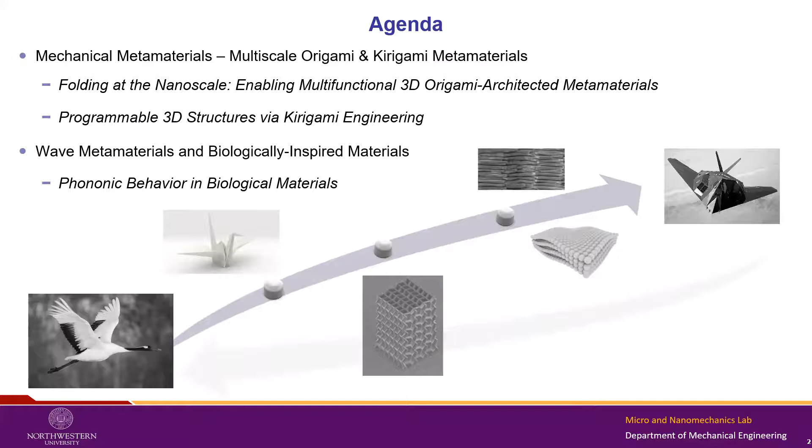In mechanical metamaterials, you usually have meta atoms, which are units that repeat and can deform, fold, rotate, or snap. This has given birth to a wide array of metamaterials, including cellular and extremal metamaterials, mechanism-based metamaterials, and instability-based metamaterials, which have brought this interesting concept of buckliphilia versus buckliphobia. If you have the same background as me, we were usually taught that buckling is a phenomenon to be avoided, but there has been a lot of research into actual functionalities of buckling, like how can we exploit buckling for good purposes. And then we also have topological metamaterials.

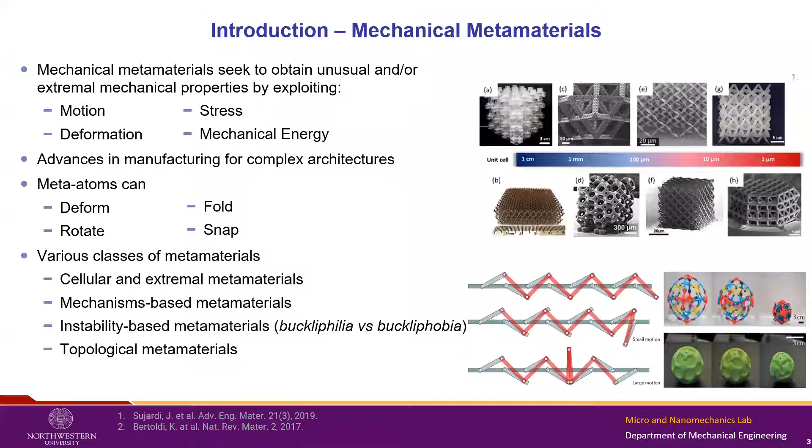So within the first subset of metamaterials that we have studied, we have the field of origami engineering. The most salient property of origami designs is the property of folding. Origami comes from the Japanese art of paper folding, so that's basically what we try to recover when we do origami engineering.

This property of folding, this foldability, enables shape morphing. We can obtain very complex patterns just by exploiting this foldability. There are actually some universality theorems that basically say you can fold pretty much anything, and that's what I'm showing there with the origami bunny, which I don't know how many hours that took, but must have taken lots of hours.

Another interesting aspect of this foldability is the property of deployability, which enables going from 2D structures to 3D structures. This is important for space optimization.

These origami metamaterials have been discovered to have some very interesting mechanical properties just from the geometrical aspects of their folding. So we have auxeticity, stability, directionality or anisotropy, and tunability. We can change these properties with compression or with deformation. And we also have the issue of scalability.

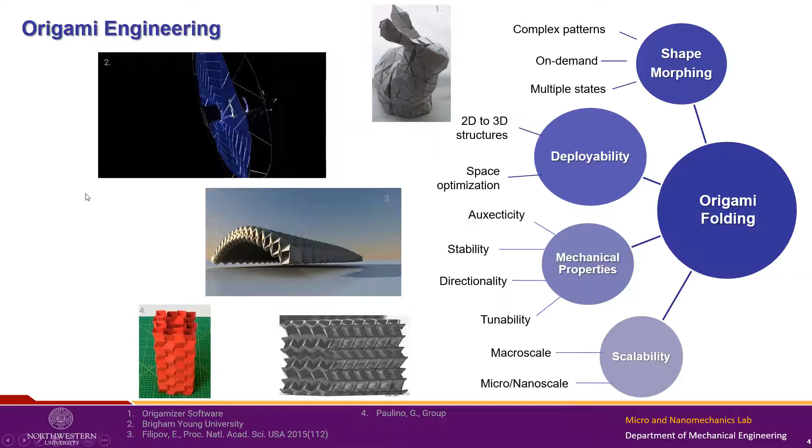So we can take origami concepts from the macroscale to the micro and nanoscale. So it's all very nice. But it's easier said than done, because the translation of these paper origami concepts into actual origami metamaterials is not very straightforward.

The folding displayed in paper is very different from the folding with actual or conventional engineering materials. When we do origami with paper, what you basically do is locally damage a crease where you actually do the fold, and this brings down the stiffness in the fold. But can we really do that with actual engineering materials that are going to be subject to more stringent environmental windows? So when we try to recreate that, it creates a problem.

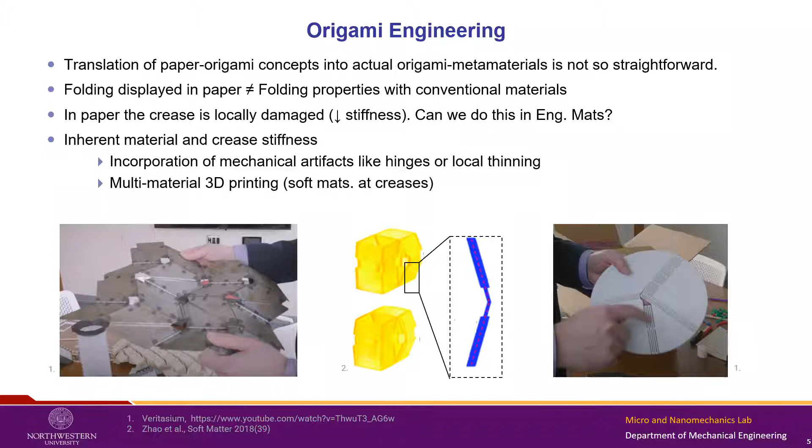People have tried to circumvent that problem or solve it by incorporating mechanical artifacts like hinges or local thinning, or using soft materials at the folds to allow this foldability. So that is one of the issues.

The other issue that kind of prevents the use of origami metamaterials is that it's nice, you can do a crane, you can do a bunny, but that's not an engineering material. So how can we use these origami concepts to create something that's actually usable, that can take load, or that can perform under different stresses or engineering requirements?

So what we did is based on a work by one of Paulino's students. We used the concept of a Miura-Ori tube, where the most famous pattern in origami is called a Miura-Ori strip. If you cut those and assemble them in some way, you can obtain a Miura-Ori tube. Then, by ingeniously assembling them, you can obtain aligned or zipper couplings of these tubes, creating a 3D origami metamaterial that has interesting properties.

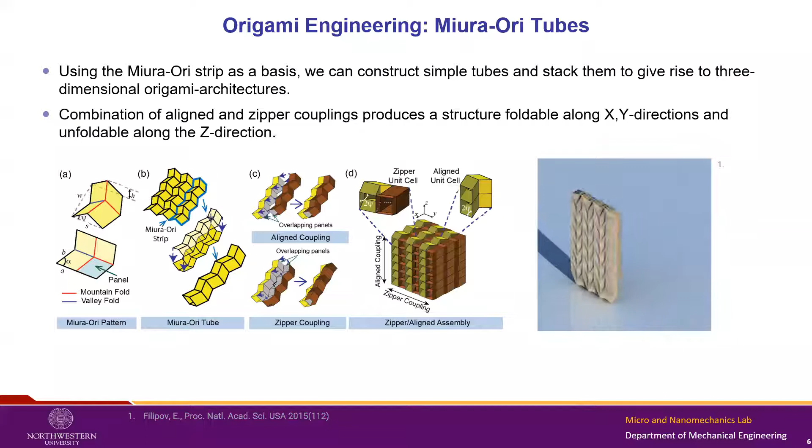So having said that, what we had, I frame it as two challenges.

We have the first challenge, which is can we recreate these folding mechanics, which are very different from paper? And the other challenge is how do we create origamis, 3D origamis that have an actual functionality? So those are the challenges, and the solution is, for the first issue, the folding mechanics, we decided to go micro and nanoscale origamis.

And for the second challenge, we used the concept of these Miura-Ori tubes to create these 3D origamis. In the middle, we have multifunctionality, all these properties that we were able to recover that were predicted from basic geometric analysis of these Miura-Ori tube assemblies. We were able to recover most of these properties. This work was published last year in Small, and it got some interesting news coverage.

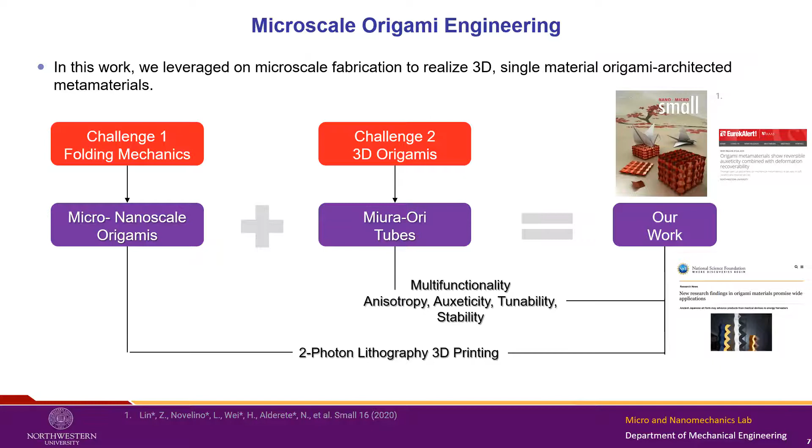So how did we do this? As I said, the first challenge was the challenge of folding, so to do that we went to the micro and nanoscale. We fabricated via two-photon polymerization, two-photon lithography, which was done by Sridhar Krishnaswamy's group here at Northwestern. They have a lot of experience printing these kinds of structures, which are quite complex actually, because you have angles and panels, and a lot of difference between the thickness of the panels and the actual length of the unit cells.

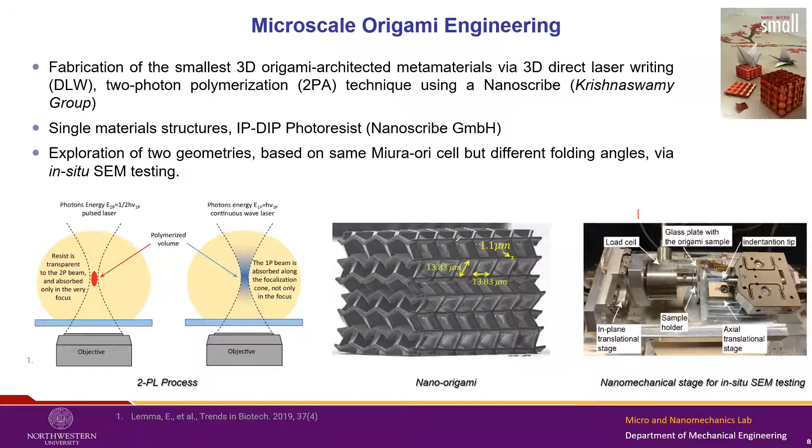As I said, we were able to recover most of the properties that come from this foldability. The first interesting properties that we were able to see were the stiffness anisotropy. Basically, once you have this 3D Miura-Ori tube assembly, you have two directions that are foldable, and then you have one direction which is stiffer, which is the one where you have the zipper coupling that I mentioned before.

And so we were able to observe, by doing stepped compression and recovery phases instead of a simple cycle of compression and unloading, as you see here - we compress, and then we cycle back and forth, and that allows us to study the stiffness tunability of these metamaterials as the overall compression of the structure progresses.

So we were able to see that the stiffness does change with compression depending on the orientation, and as you can see here in the pictures, we were able to retrieve that foldability, which was one of the main challenges we had, and what distinguishes origami designs from other kinds of metamaterials. They also have some very interesting properties - you can compress these structures to like 30%, and then recover up to like 96%. So that was pretty encouraging as well.

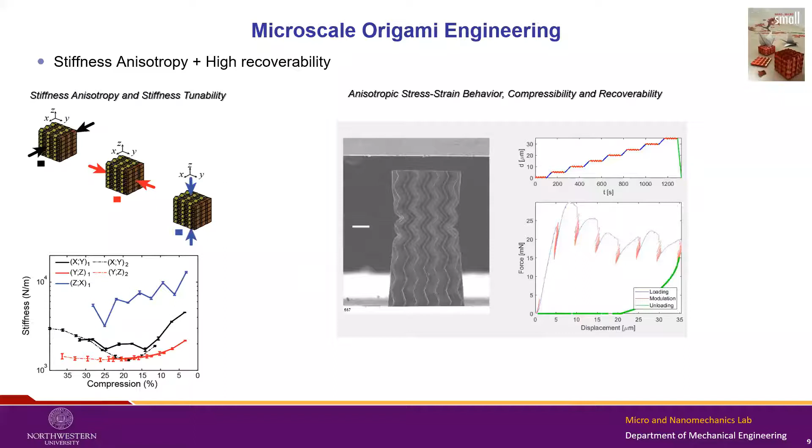And as you have probably seen in this video, there's some interesting auxetic effect, and that's one of the other interesting aspects of these structures, which is that they have a tunable Poisson's ratio that changes with compression, just like the stiffness. And depending on the orientation, the direction that you're looking at the same structure, you can have auxetic behavior or almost close to zero Poisson's ratio.

So here you can see, to the left, that when I'm looking at this structure from one side, we have auxeticity. And then when we look at it from the other side, we don't - there's practically zero Poisson's ratio. Same thing with the structure in a different morphology of the structure.

Also, what we found when we were analyzing one of these geometries was that these origami designs, as predicted from geometric analysis, can exhibit what we call a switchable or reversible Poisson's ratio, which means that the Poisson's ratio changes signs throughout the compression. So these structures, as you compress, they start having a normal or conventional Poisson's ratio.

So as you compress, they expand, but then there's a switch. Something happens in the structure, which is a folding bifurcation. So as the panels fold, they come to a point where they can bifurcate, and that can trigger a negative Poisson's ratio. So as you keep compressing, the structure develops or exhibits an auxetic behavior.

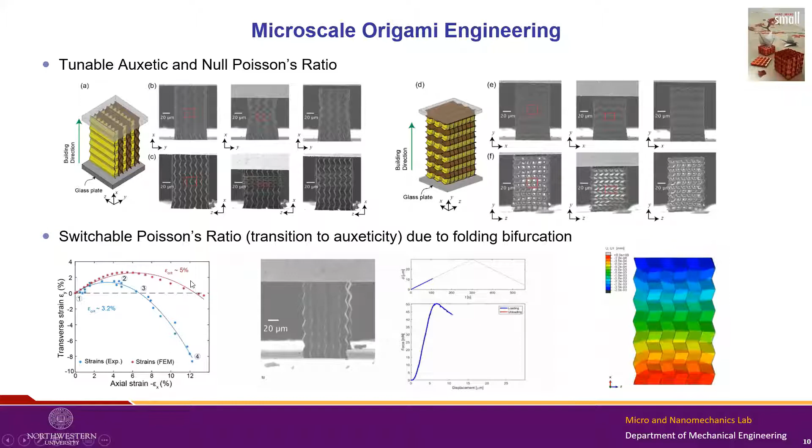And we also did some modeling, continuum modeling, FEM on these structures, and we were able to recover that. So that's a brief part of the origami work.

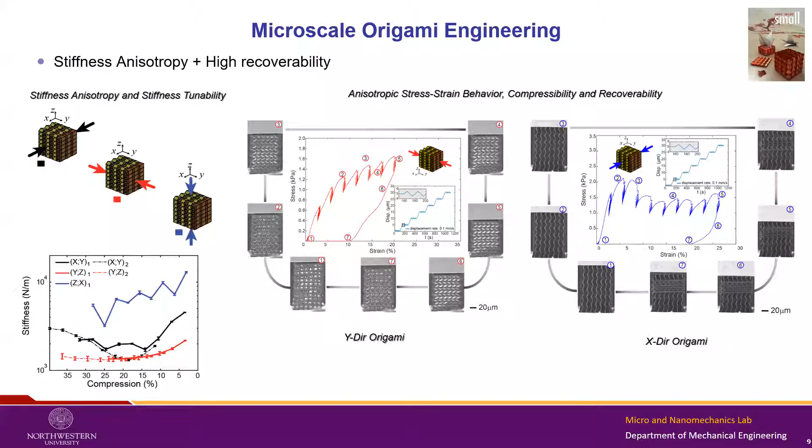In all of these topics that I'm going to be touching on today, I like to finish with some opportunities and what we're looking into, or what can inspire further work. These properties have some very interesting wave dynamics, because as I showed in the stress strain curves, some exhibit strain hardening effective stress strain behavior, while others exhibit more like a plateau or strain softening. So that can give way to some interesting wave dynamics, like compression solitary and tension solitary waves.

And something of this has been shown in a paper that came in Science Advances.

And then we also feel that these origami lattices can have some interesting energy dissipation properties from the cyclic loading, elastic buckling, hysteretic effects from friction, etc.

And then we can also do some material enhancement, because here we just showed origami structures printed with a single material, which is a common two-photon lithography material, but we can improve the properties that we want, for instance, by doing ceramic coatings or even metallic origami.

And then this, on the side of applications, not so much on the fundamental aspects, they can be applied for soft robotics, sensing, actuation, and pretty much everywhere where we have a need for these tunable properties, where we can change them based on the level of actuation, and where we can also leverage the foldability of these origami structures.

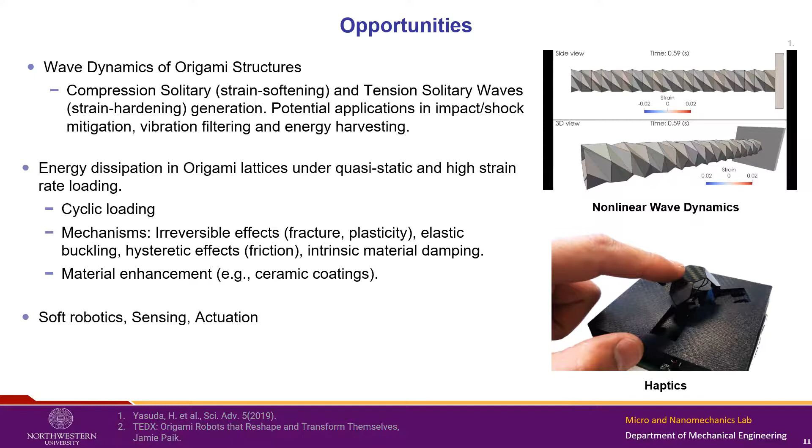So the other topic that we've been working on is Kirigami Metamaterials. I don't know why, but interestingly, within the group, we studied the metamaterials that are derived from these Japanese art forms and not other kinds of metamaterials.

I don't know if you're familiar with Kirigami, probably you are, but instead of origami where you fold paper, here you introduce cuts on a paper and you derive some shapes. People in Japan, back in the Middle Ages, thought that was an interesting pastime, so they developed these paper art forms to have some fun.

And within the Kirigami engineering, we have two different branches. The first one is called lattice Kirigami, where basically it's kind of a mixture of Kirigami, where you have cutting of paper or material, and then you fold along certain creases. So I would say it's a mixture of origami and Kirigami, and you can give way to certain shapes.

And the other one, which is the one we're interested in, is called, was defined in a paper by Callens as Kirigami-Engineered Elasticity, where we produce cuts at various locations, but we don't really care about the folding. We just care about using that apparent high elasticity or stretchability that derives from those cuts.

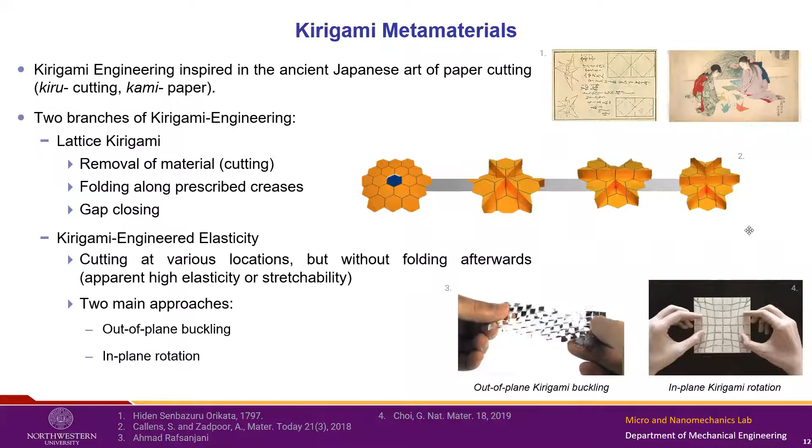And there are two main approaches, which are shown there in figures 3 and 4. One is the out-of-plane buckling, which occurs in these structures, and the other one is the in-plane rotation.

Within that subset, we've been studying a very simple Kirigami object or Kirigami motif, which is basically just a rectangular plate that has two C-shaped cuts and then vertical U-shaped cuts.

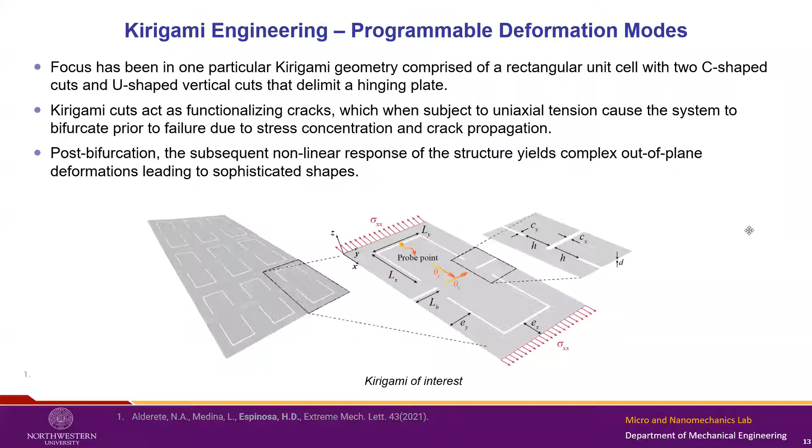As I said, these structures, when they are stretched, instead of failing by some crack propagation in the cuts, what happens is that some bifurcation happens. So these structures buckle under tension, and they give way to some very interesting nonlinear responses, which beyond the stress and strain relationships, produce some really interesting out-of-plane shapes, which can be used for different things.

So the first work that we conducted in the group was interestingly at the nanoscale, or micro-nanoscale, where we used some focused ion beam patterning that created some residual tensions in the substrate, which is a silicon nitride substrate. This created some residual stresses that caused the material to bifurcate without actually applying any tension, so it's not controllable. So just by doing the FIB patterning, that generates the sort of natural emergence of this Kirigami phenomenon.

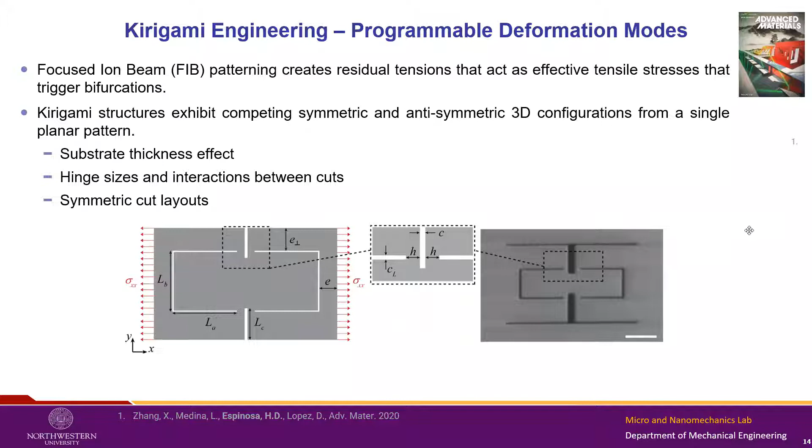Here we studied the substrate thickness effect, whether thicker substrates cause the phenomenon to arise or not. Then we studied some very basic hinge sizes and interactions between cuts, mostly focusing on symmetric cut layouts. This work was published early this year in Advanced Materials and was on the front cover.

This is basically what we observed: an interesting substrate thickness effect. Once we go beyond a certain threshold, the Kirigami effect does not appear, but below that threshold these Kirigami motifs appear. From our more limited investigations, we found we can obtain two kinds of patterns: antisymmetric modes or symmetric modes.

But there are some interesting complex 3D shapes which can be used. We were able to determine a kind of landscape where, based on the hinge size and cut width parameters—the only parameters we were changing—we observed two different landscapes: an antisymmetric mode and a symmetric mode.

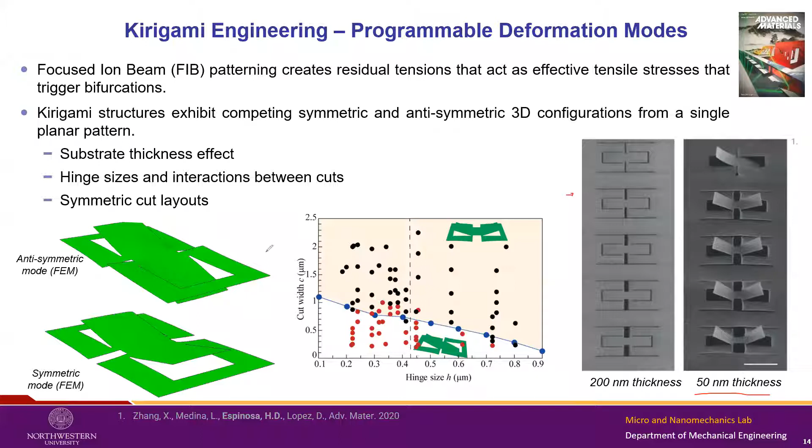We took this work a bit further, and instead of just studying purely symmetric patterns in all directions, we started playing around with other parameters, and some very interesting things showed up. For instance, this is a Kirigami motif which is symmetric with respect to the x-plane.

We were able to observe pitchfork type curves, in the sense that we have this bifurcation, and then the inner panels, the ones we're interested in that have these interesting rotations, emanate from a single bifurcation point.

As you stretch—now we're pulling the Kirigami rather than the FIB—this was done computationally, and I'll show you some macroscale experiments. As you pull, you see the emergence of a deformation emanating from a single bifurcation point, along with some interesting symmetry breaking properties.

In this design, we have symmetry with respect to the x-plane. If we change that and have symmetry with respect to another plane instead, we no longer get bifurcation emanating from a single point, but sequential bifurcation. As you stretch, one of the plates bifurcates and starts deforming out of plane, and as you continue stretching, another plate starts exhibiting that bifurcation, and so on.

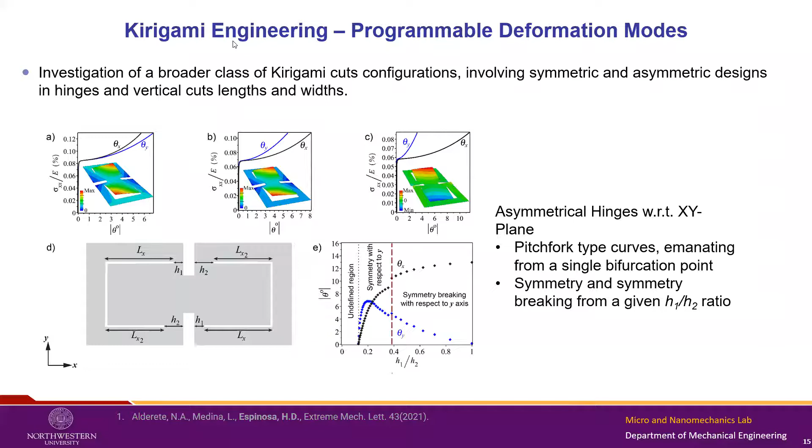We actually confirmed these things at the macroscale, testing some of these patterns there. We used a very classy, old technique called the shadow moire technique, which allows us to map out-of-plane displacements very elegantly. This let us confirm the FEM simulations at the macro scale, and showed how small changes in the Kirigami motif—playing with asymmetries and symmetries—can produce a very wide range of out-of-plane shapes.

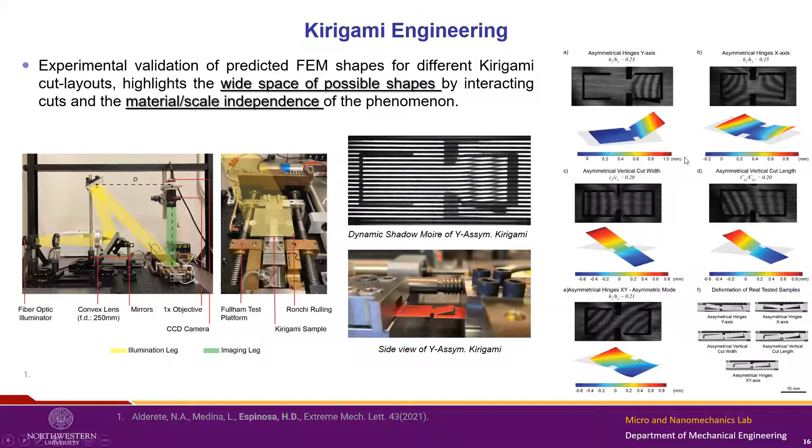Why is this important? We believe these structures can be applied to many different things. We can create patterned surfaces by collecting many of these Kirigami structures into arrays, and actuate them under tension to obtain programmable surfaces.

With patterned surfaces, we think we can affect wettability, hydrodynamic or aerodynamic flow modifiers, and use them in heat transfer to locally change the circulation of a fluid. We can also use this in a MEMS or NEMS context, like for optics—focus-variable reflectors, variable mirrors, or thin lenses where you can change the focus with tension.

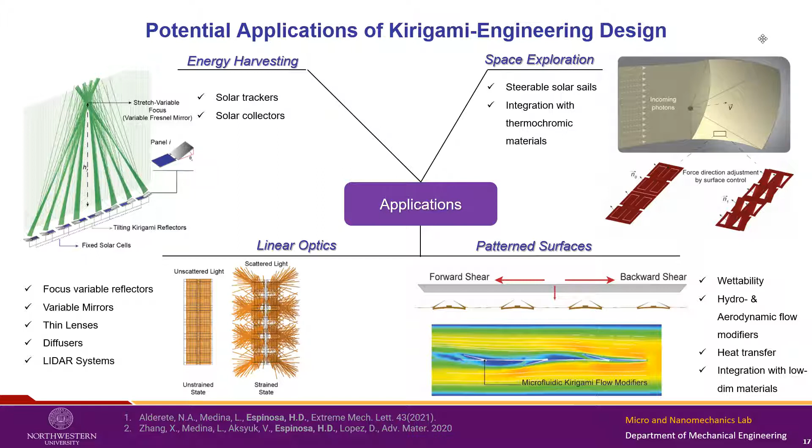Also for energy harvesting. And we had a more unconventional idea: using this as a steerable solar sail, where you can change the angle of incidence of incoming photons, giving steerability in a solar sail application. So this is just a very broad overview.

Going a bit further into one example: we can put many of these Kirigami structures together and actuate them under tension to obtain, in this case, the design of a Fresnel mirror, where each panel follows a parabolic law that creates a focus. We did some ray tracing simulations using FEM input. This is just one application showing how we can create programmable actuators or surfaces for an interesting optics application.

So what is more interesting, and what we are wrapping up now, is that we discovered that even with a very simple cut layout, we can obtain a very rich set of possible 3D out-of-plane morphologies. Depending on the cut dimensions and relationships, the symmetry or asymmetries between these cuts, we can obtain a range of 1- and 2-dimensional rotation. So the panels can not only tilt, but they can twist as well, they can warp. We have a plethora of possible design space to create functional structures.

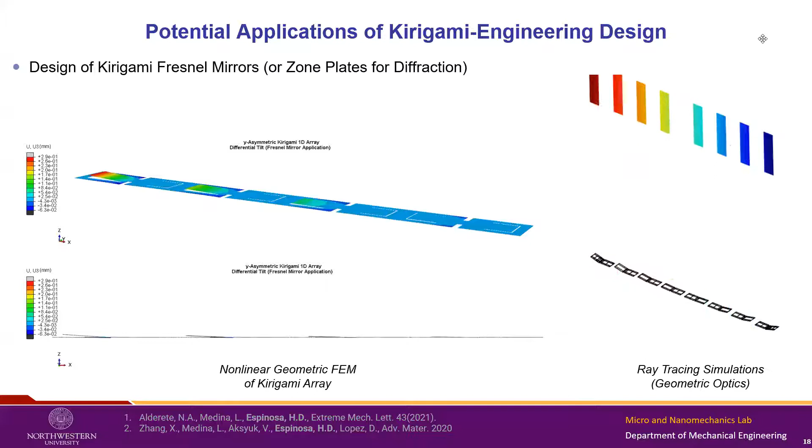So we're thinking, can we take this a bit further beyond this phenomenological description and study what really dictates that Kirigami behavior? What are the relationships between cuts that dictate what the buckled, the post-buckled shape is going to be? And can we obtain surrogate models to design Kirigami structures for a target function? In other words, what is a Kirigami pattern that we need to obtain a desired tilt or deformation?

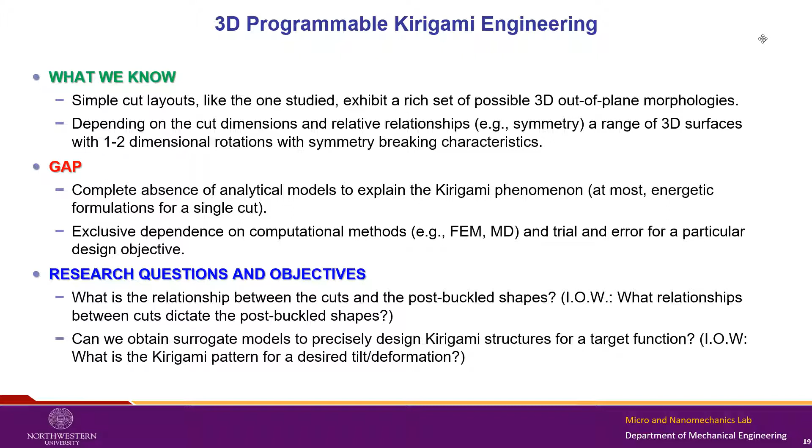And in this sense, we're trying to use some machine learning methods to answer these types of questions. So basically, we're not trying to develop a new machine learning algorithm, we're just trying to apply machine learning to solve some Kirigami design problems.

So basically, we just create a database based on a uniform, a Sobol sequence. And then we obtain certain displacement metrics from FEM nonlinear models. And then we're trying to feed that into a framework where basically we try to answer those two questions. First of all, how can we obtain these functional relationships that explain how the cuts in a Kirigami dictate their behavior? And then, from an optimization, design optimization point of view, using forward and backward neural networks, obtain from a desired design or function, the design that we should use to attain that.

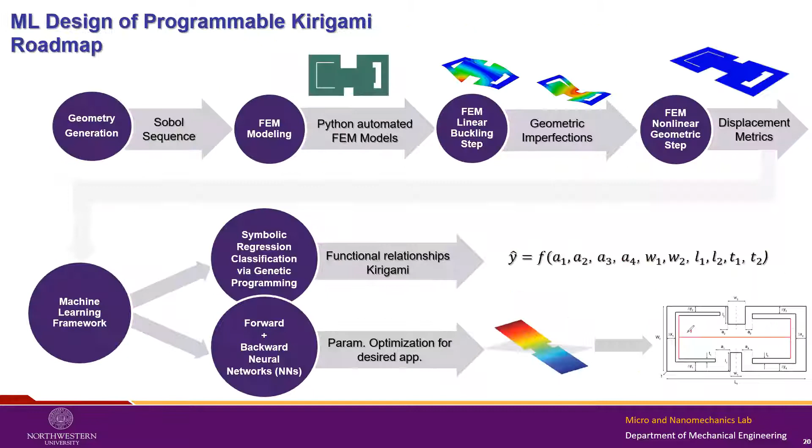Just to show the space, because we've been varying all the possible parameters in this Kirigami, like the width of the cuts, the length between the hinges, etc. Just doing a very simple principal component analysis, we've been able to map this wide space of Kirigami configurations. And if you do that just for the center line of the Kirigami, we can obtain a comprehensive map of the space of 3D deformations that we are dealing with.

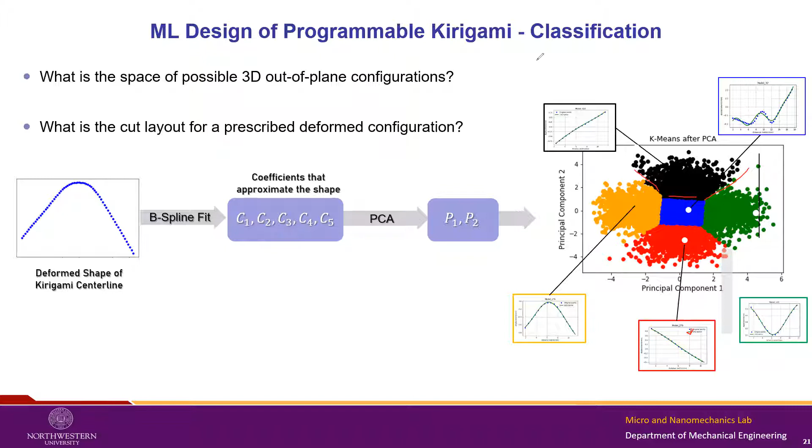And each one of these points in this PCA map does not have the features of twist in the different edges. So as you can see, even though this PCA gives five basic deformation modes, which are like U-shaped or ramps, we have to multiply or compound that by the warping of the inner panels, which gives twists, and that way augments the potential design space of the material.

So in the interest of time, that's basically a very broad description of the work we're doing in Kirigami Metamaterials. And as I did for the origami part, I want to highlight some of the opportunities that are interesting in this sub-branch of research.

So it is very interesting that both the origami and the Kirigami metamaterials have some sort of scaling invariance. As I showed, you can retrieve the same properties that you see on paper at the macro scale. You can retrieve them at the micro and nano scale.

So we're looking into patterning this Kirigami motif in flexible two-dimensional materials like graphene, TMDCs, and MXenes via lithographic techniques. With that, we are trying to create reconfigurable meta-surfaces with engineered electromagnetic properties, which can create metalenses, light emitters, light absorbers, photodetectors, and nano antennas.

But you can also alter the electronic properties. If you look at band diagrams, you can actually modulate these dispersion diagrams with tension, and also by triggering bifurcations. When you induce curvature in these materials, you can affect the band structure and density of states, which has implications for electronics, but also for heat transfer and phononics.

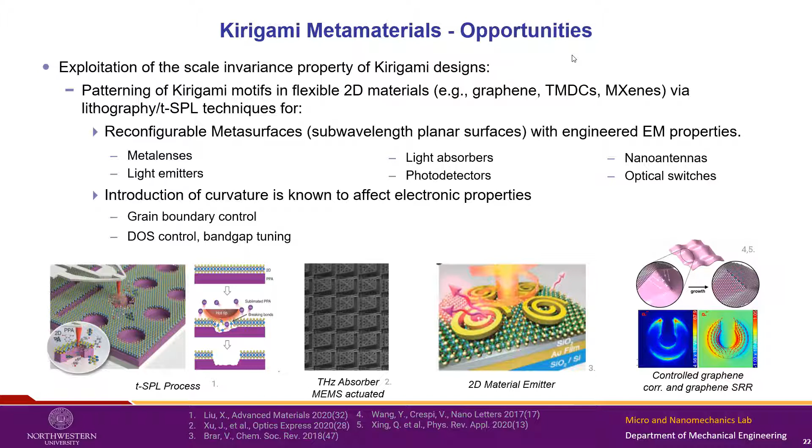A bit more opportunities, a bit more out there - in the lab we're also, as Saurabh said, there's a side of the lab that deals with cells. You can use these patterned surfaces to leverage the concept of curvotaxis, which comes from the Greek. Basically, you're trying to give topographical cues to cellular systems, because it was found that cells can react to topographical cues. So you can tune or modulate migration of cells by changing the curvature or topography of the substrate they're in.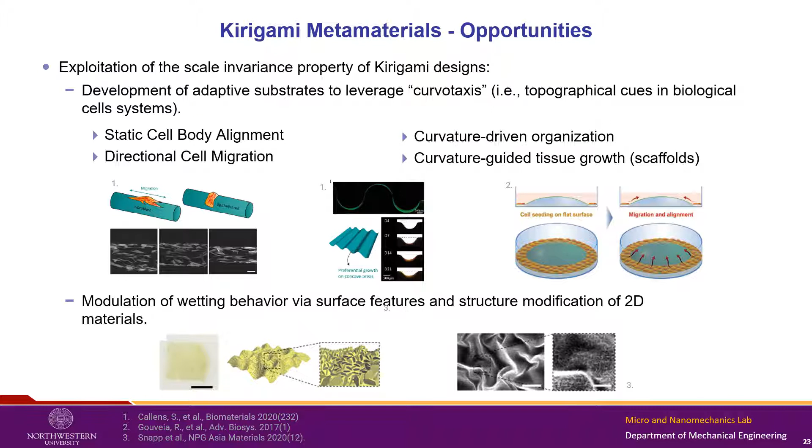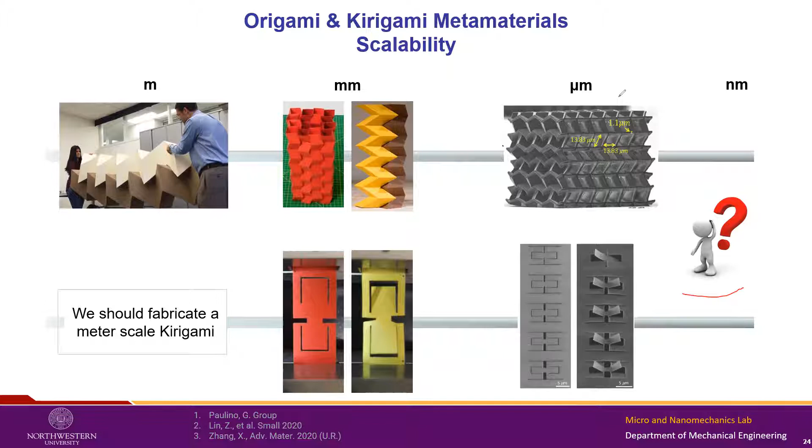For the last part of the talk - I think we're doing okay in time - I would like to go back to these bio-inspired materials, which may seem disconnected, but as I conveyed in the first slide today, metamaterials were originally envisioned to alter electromagnetic properties, and electromagnetic properties are basically waves traveling through space.

In the first part of my PhD, I did some pure biomechanics work on biomaterials that I decided to join with these concepts gained from metamaterials. I joined them by trying to study phononic behavior in biological materials.

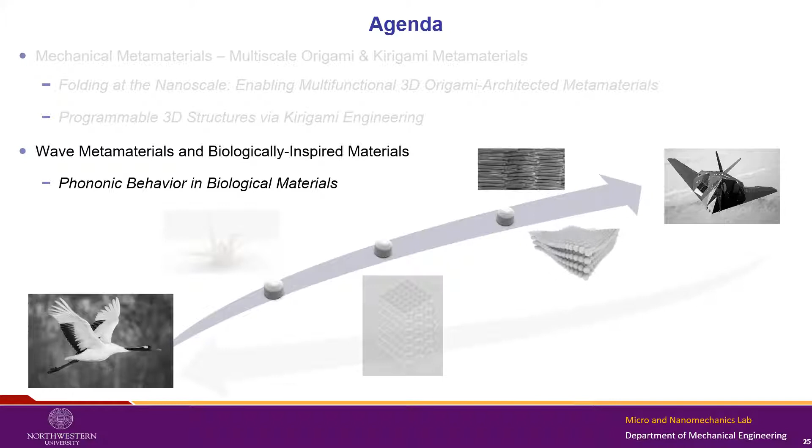So basically, we're trying to study how elastic waves propagate through the complex structures found in biological materials. This is the intersection I was talking about at the beginning of my talk. Phononics is a concept that comes from the acoustic metamaterials community, or also from heat transfer, but we decided to use that from metamaterials and merge it with biological materials to see if we find interesting intersections there.

So what is interesting about biological materials? Very shortly, biomaterials are very interesting - they have tremendous, extraordinary, and remarkable properties in terms of impact, strength, toughness, and also in terms of modulation of properties with hydration, temperature, pH, etc. So they're very versatile materials, and scientists and engineers have been looking at nature for inspiration for actual engineering materials for a long time.

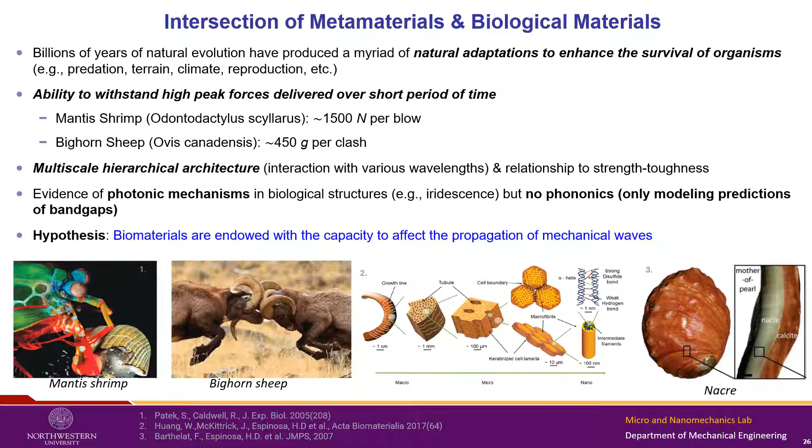One of the interesting features about biomaterials is that they have a multiscale, hierarchical structure - many different features at different scales, which in turn give them these very interesting properties. This multi-scale and hierarchical structuring reminds us of that architecturing of the material that we studied in metamaterials. So again, using those two concepts, we're trying to see if these biomaterials have interesting elastic wave propagation properties.

And this work that we're doing is exactly that - we're trying to study how elastic waves propagate through these biological materials. To do that, we are using laser ultrasonic techniques, which you probably have studied somewhere, like in experiments in solid mechanics courses, which are very interesting because they are non-destructive and non-contact techniques. So you don't really need to interfere with or destroy the material in any sense.

And they can be used to characterize dispersion diagrams - wave number frequency relationships. You can characterize anisotropic wave propagation and also mechanical properties. And we can find interesting nonlinear wave propagation phenomena like localization, focusing, etc.

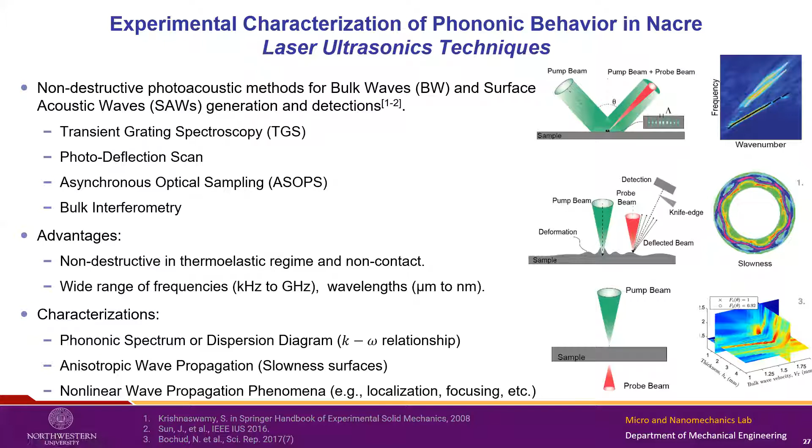I'm going to show two of the techniques we've been using. Here you can see we're studying nacre, an abalone shell, which Professor Espinosa has studied for a long time. Nacre has a very interesting brick and mortar architecture, and some people have numerically predicted the presence of band gaps in nacre-like materials.

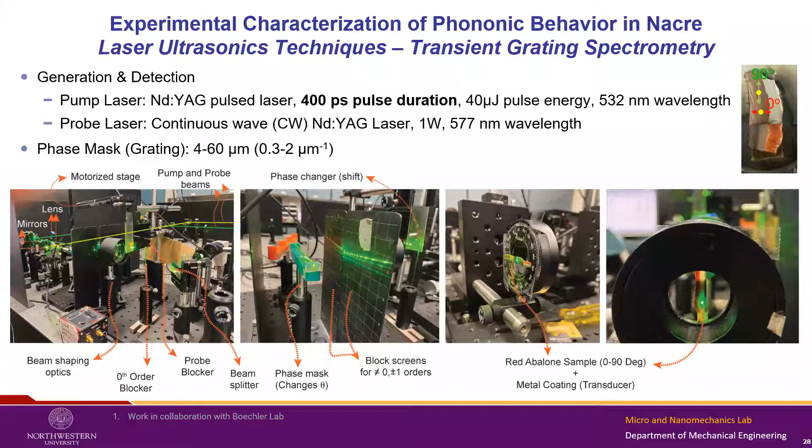We're trying to study it in the actual material using a technique called transient grating spectrometry, where we cross two lasers on the surface of a material. These two lasers create a transient grating, a transient temperature profile, which generates expansion and contraction of the material, launching acoustic waves through it. With a probe laser, we pick up that signal. This technique is limited in frequency that you can study, up to about 1.1 gigahertz.

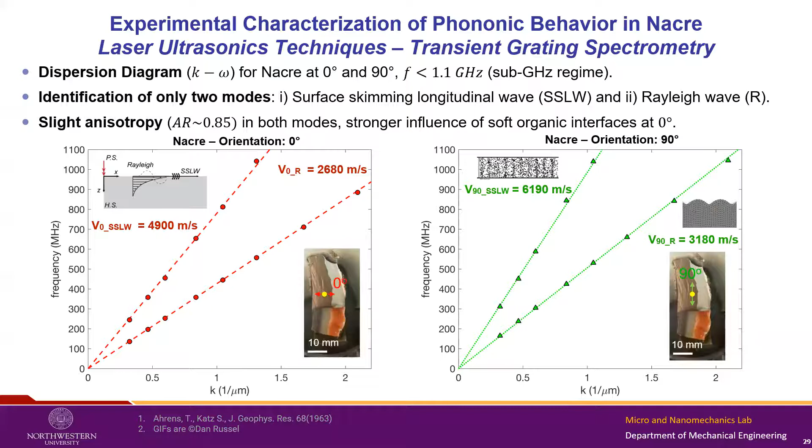So far that's what we've been studying. But you can recreate the actual dispersion diagram of these materials using these techniques, and you can also see scans of how these surface acoustic waves propagate through the material. With this, you can detect interesting phononic band gaps. Here I'm showing a simple movie of the actual nacre material, but you can filter this and map how the propagation looks for different frequencies.

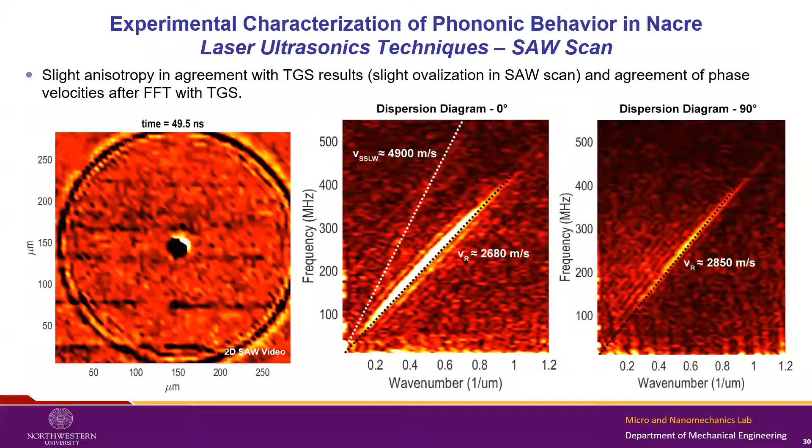With that, you can identify phononic band gaps and interesting non-linear effects, as I was saying before. That's ongoing work, so I don't have a lot to show, but I wanted to show that connection and how we're studying it.

I'd like to finish with the opportunities of why I think this work is important. From the role of basic research, these multiscale hierarchically architected structures play a role in the propagation of elastic waves. This has many applied research implications, from mechanical waves to thermal transport, because the phenomenon is also phononic. So you can use this set of experiments and modeling aspects to infer on phononic properties, but from a heat transfer point of view.

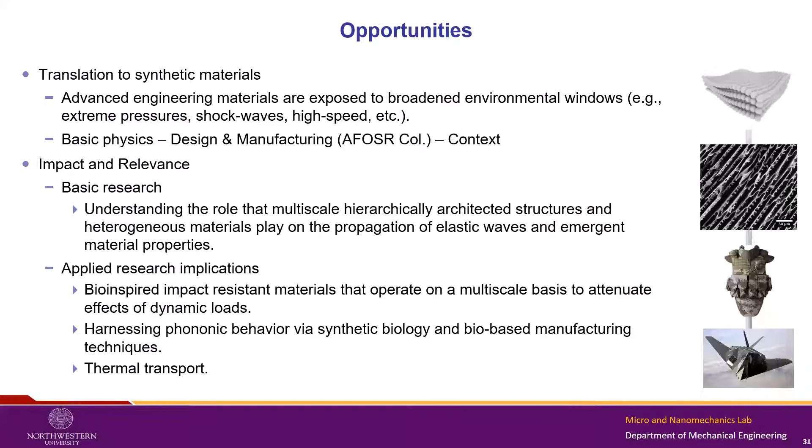With that in mind, I'd like to close the talk. I hope I successfully conveyed this connection, which as I was doing the talk might seem weird, but I do believe these things are connected somehow.

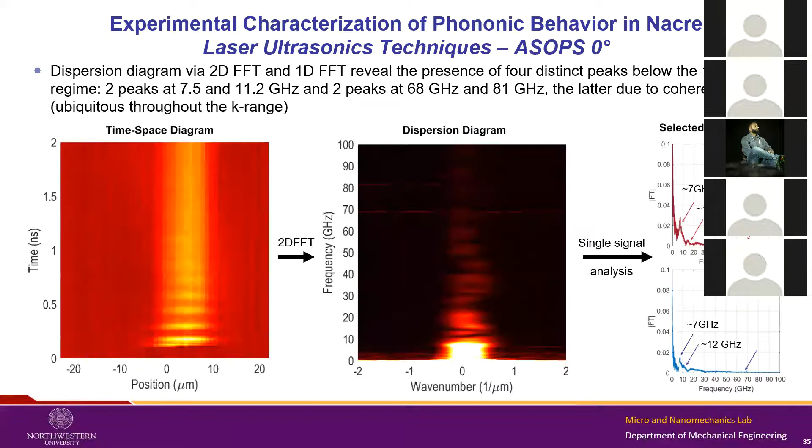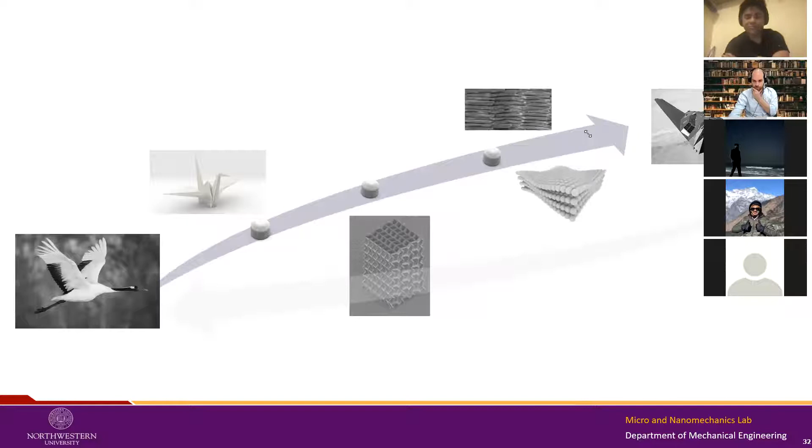Thank you so much, Nicholas, for this wonderful talk. I'm sure we've learned a lot, and those are really interesting works. It seems they have a lot of applications as well. So moving on to some questions.

One question I already have is from Khan Mohammad Rabbi, a PhD student in his advanced stage. He asks: hi Nicholas, thanks for your presentation, very exciting work. He wants to know whether you've conducted any dynamic tests like fatigue analysis on the origami motivated 3D structure.

And if so, can you comment on the modes of failure this type of material will undergo. So no, we have not conducted any fatigue tests on these origami structures. I do think it's an interesting property to study. As for the failure modes, typically in these plate and shell metamaterials, failure occurs at the joints, at the creases where the panels meet, and there you do have some plastic collapse. At least in the structures we observe, you have some plasticity and some tearing, but the failure always occurs at the joints.